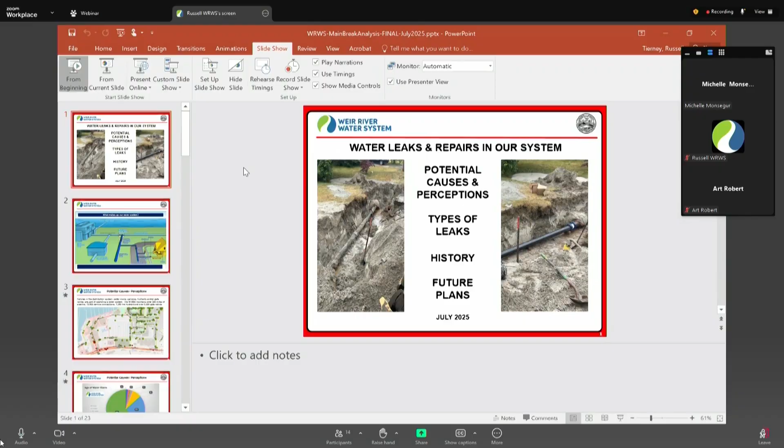So, Bill, we put together a small PowerPoint presentation, and I want to go through it as soon as it decides to come up. Can I get it closer? Sure. Never been accused of not being able to be heard.

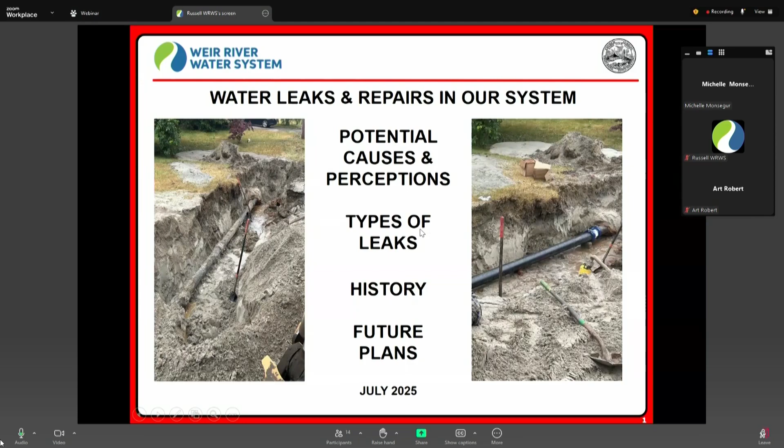So what we're going to look at today is potential causes and perceptions about the water mains and the causes for water main breaks, the types of leaks that can occur in the water system, the history of water main breaks throughout the past 10 years, maybe going back to 12, and then future plans to mitigate what is going on with the water mains and things like that.

What makes up our water system? This is basically just a sketch of a water system. Your basic water system is your water treatment plant coming from your sources. You have a reservoir that holds the water, which is our tanks. Then we have a complete distribution system throughout all three towns that we service. From there, the distribution system goes to service lines, which go to each house, or fire hydrants, which are for fire protection.

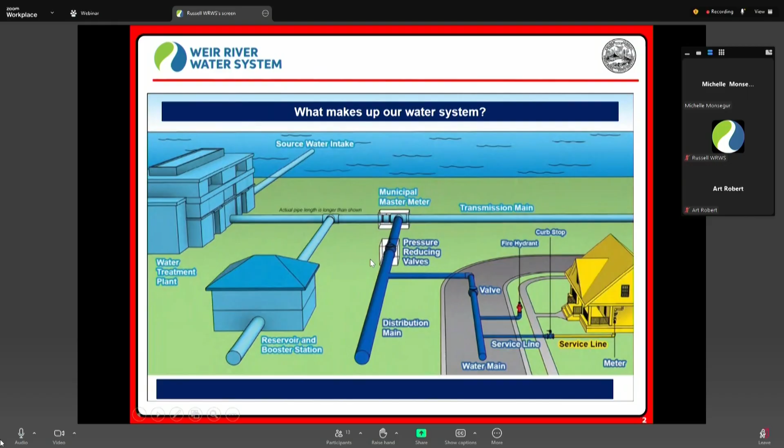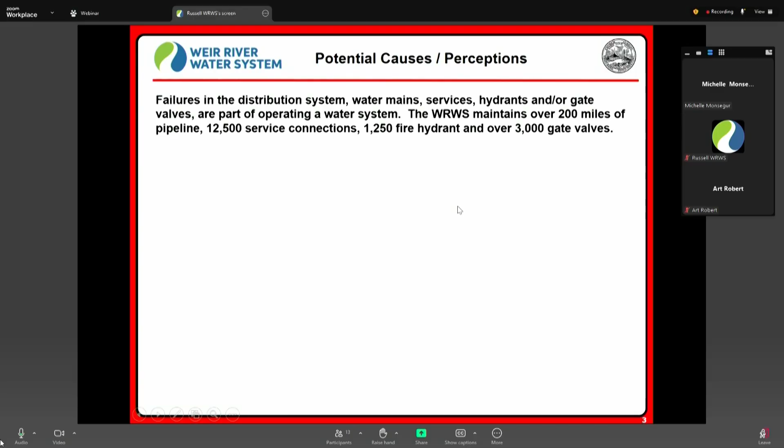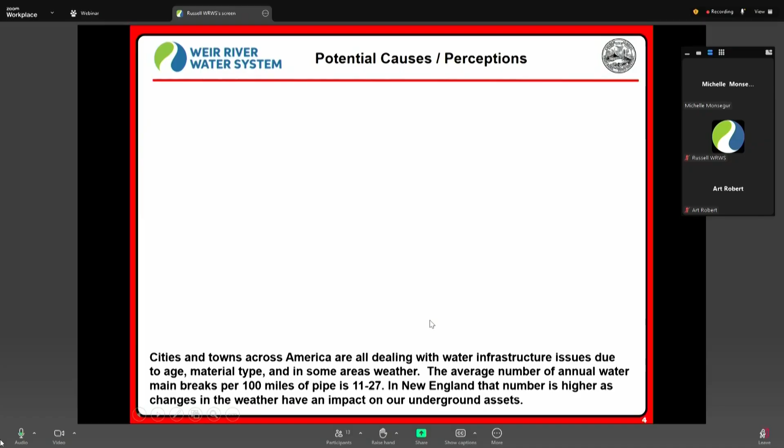Cities and towns across America are dealing with water infrastructure issues due to age, material type, and in some areas, weather. The average number of annual water main breaks per 100 miles of pipe is 11 to 27, based on a variety of resources that I found. The 11 is on the low side, in milder areas. The 27 is on the high side, in New England and colder weather areas. The average in New England is higher because of the weather changes and their impact on our underground assets.

This is the age of our infrastructure. The green shows that 64% of the mains in the Weir River water system are greater than 50 years old. When we did the master plan, we looked at every pipe over 50 years old, because by the time we replace stuff that's 75 years and older, it'll be time to replace stuff that's 50 years and older. So we decided as a group to go and look at everything greater than 50 years old.

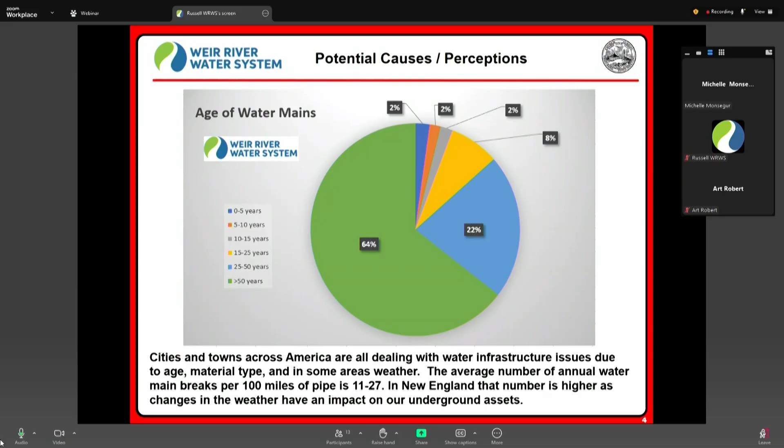Discolored water is often a result of water main breaks, service leaks, and on occasion planned system maintenance. Ongoing effective system maintenance is key in reducing the extent of discolored water during breaks and leaks.

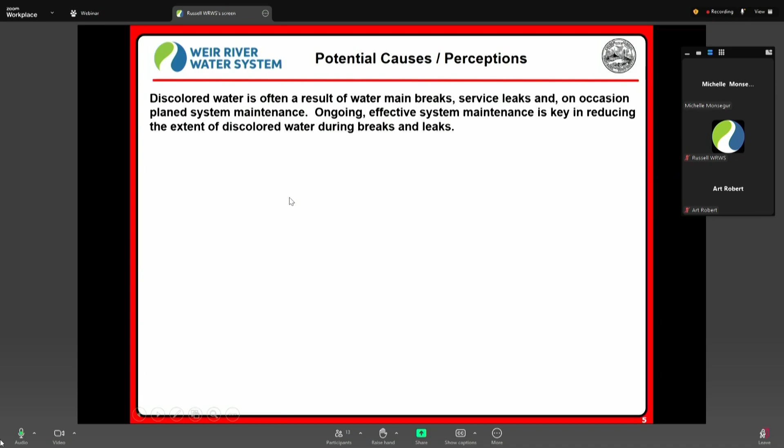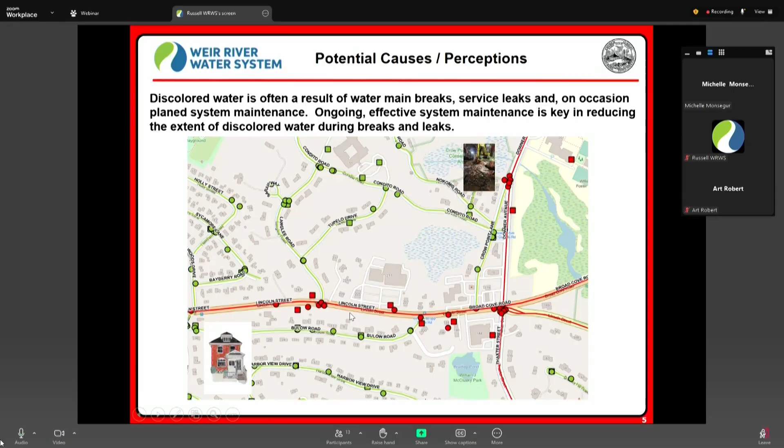Also, our improved communications protocol is contributing to the perception that the number of water main breaks has increased over time. Five years ago, we did not put out on Facebook that we had a water main break. We just had one, went and fixed it, and that was it. We would call the people immediately affected by it. They would know about it, but everyone around them would not. But we do think it is important to utilize these things.

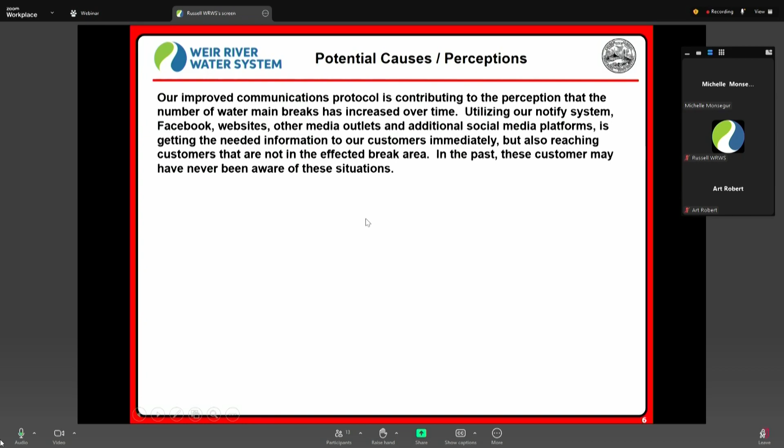So we utilize our notification system, Facebook, websites, other media outlets, and additional social media platforms in getting the needed information to our customers immediately. But it also reaches customers that are not in the affected break area, and in the past these customers may have never been aware of these situations. I am noticing in some cases there are people from out of town chiming in and saying things that I don't think they really know about. But again, we do feel that using Facebook and all these things are important to our customers, so we'll take that extra backlash if that's what happens.

What can cause water main breaks? Changes in temperature, thermal expansion, freezing and thawing. Over the wintertime, as the ground frost deepens, it can move pipes that are shallow, and then when it starts to thaw, these pipes will move and break. That has a lot to do with age and material.

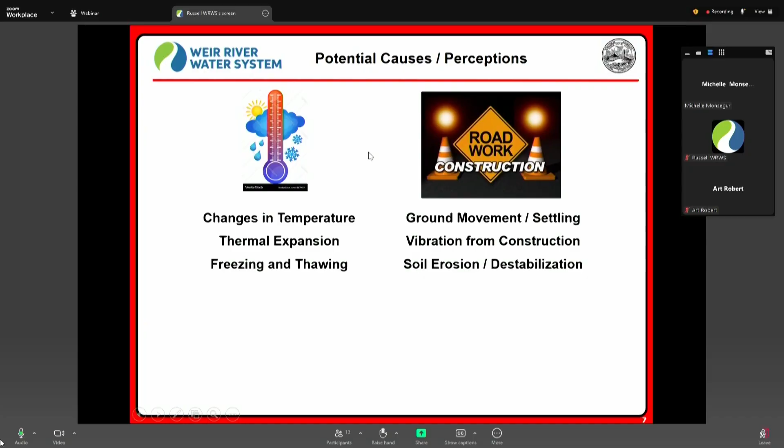Ground movement, settlement, vibration from construction, soil erosion, and destabilization. In some areas where we've done road construction, we're going to replace the water mains, because after you tear up the road and start compacting it again, the older mains are going to crack or something's going to happen to them. This is a really tough thing to do because sometimes we have to take the chance and not do that road, depending on where we are with our capital work and everything else.

Then age, pipe material, and corrosion. This is a couple of pictures of pipe that have been tuberculated. On the right-hand side is a pipe that's heavily tuberculated. That did come from our water system. The one on the left is more corrosion. Corrosion is not as common these days because we use chemicals to increase the pH in the water system, which mitigates the corrosion effects. But you also have to remember some of these pipes are 100 years old, so prior to using corrosion control, there was nothing being put in the water, so they already had that effect on them.

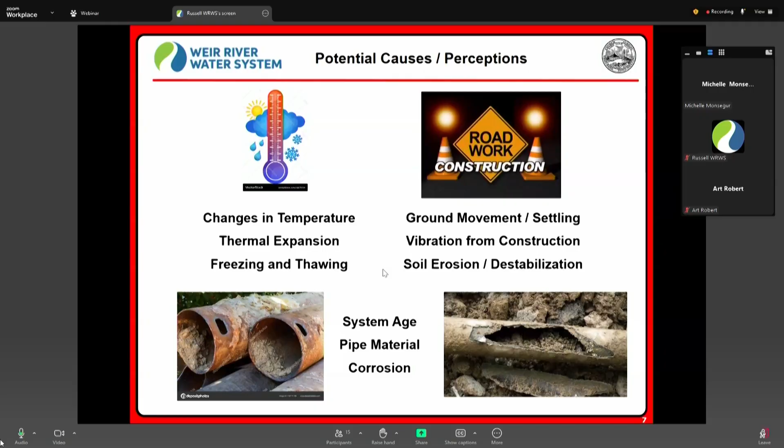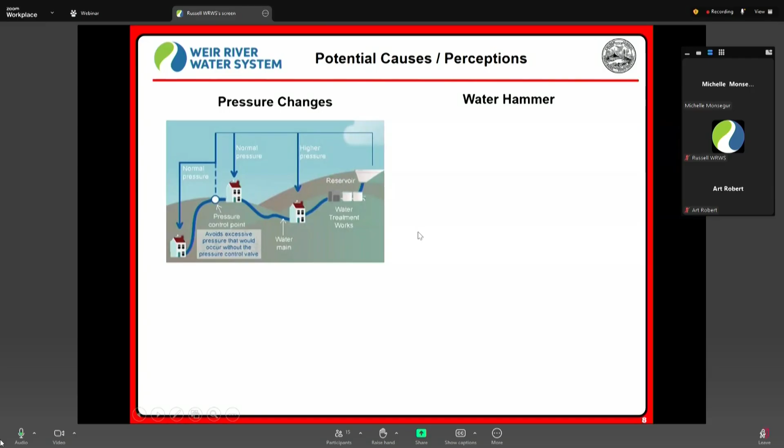Pressure changes: as the pressure changes within the system, it can cause water hammer, which is the next picture. What happens is the water hammer puts stress on the pipe. If the pipe is aged or in an area that can't absorb all that extra water hammer, the pipe will crack.

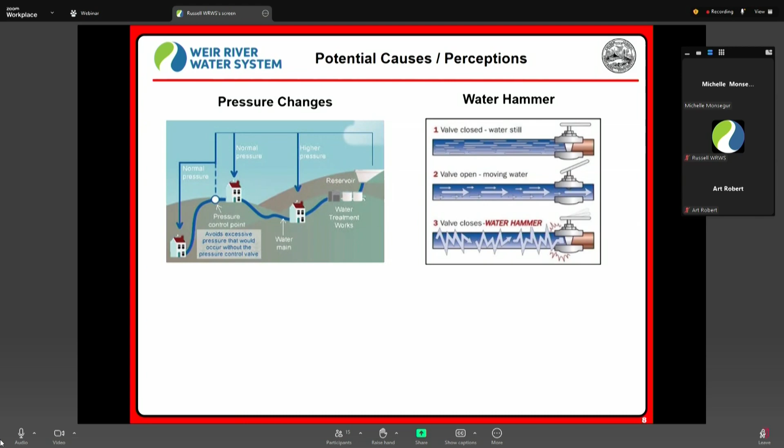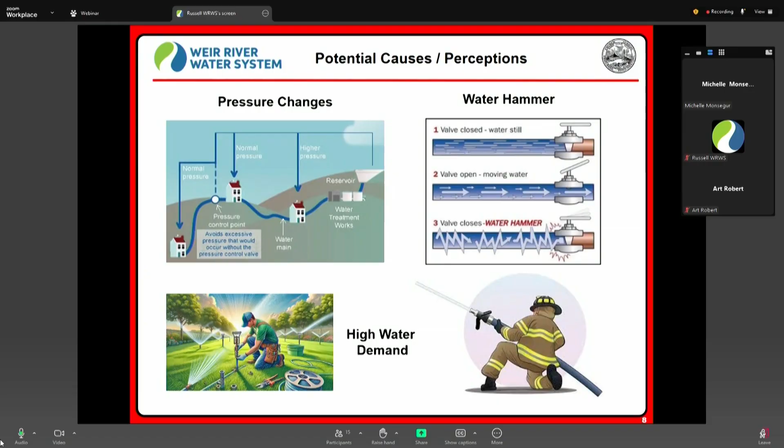And then most importantly is high water demand. So if we're fighting a fire and we have irrigation going on and we're trying to pump water out of the plant to keep up with the fire, it's going to cause water hammer. Water's going to want to go to that fire, but we're trying to push water to the other side of town. They're going to meet somewhere in the middle and cause a water hammer. Now again, as the system's designed and as things are put in place, water hammer can be absorbed by the system, but there are cases where the water hammer could reach a dead end or something like that and pop the pipe.

Types of leaks. We get leaks on water mains, which are our larger diameter pipes in the water system, typically greater than 2 inch or larger, and are used as a transmission line to distribute water throughout the system and provide fire protection. We get water service leaks. These are typically smaller pipes in our system, less than 2 inches, and provide water to individual residents and businesses. There are services that can be larger. It's in very rare cases for larger buildings, but again, most of our water services are less than 2 inch in diameter.

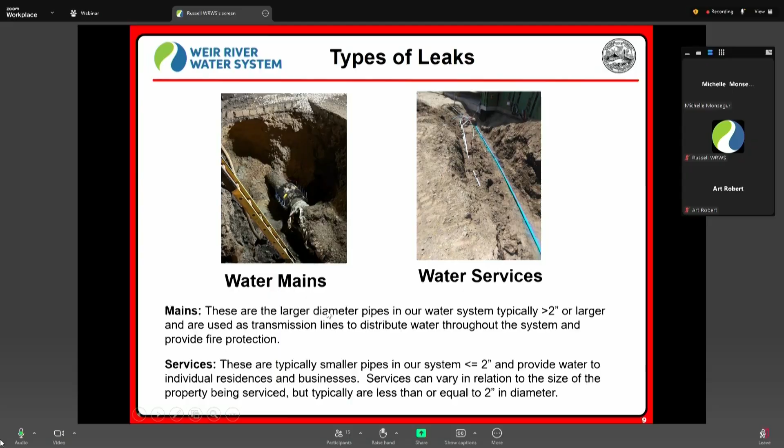We can have hydrants leak. Over time, the bottom of the shoe at the very bottom where they meet, sometimes the bolts can become corroded and they'll start to leak there. They can also leak at the valve that's connected to the water main over time. So these are things that when we inspect the hydrant, we can notice and then we can replace those fire hydrants.

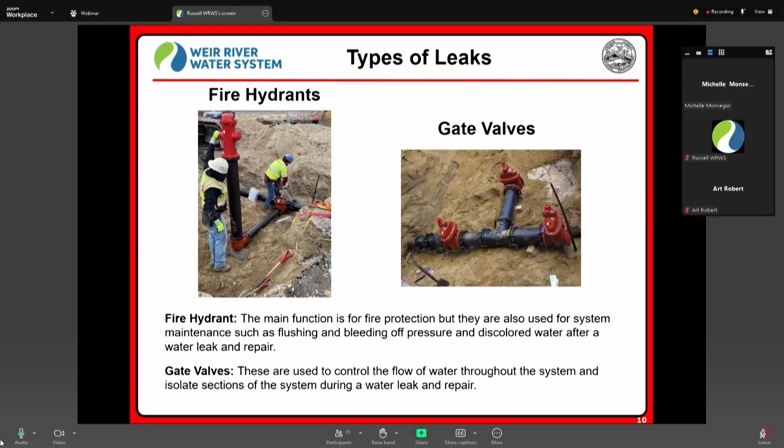And then valves. Older valves can leak, especially from the top. On the top of the valve is packing. As you work those valves, sometimes that packing will start leaking, and sometimes it just will not stop leaking. So that's why sometimes you'll see us work valves, and 3 days later, people will be calling up saying there's a leak in the street, but it's just a valve leaking. And sometimes they'll reset themselves. It'll start to reset itself, and then it'll stop leaking, but other times it will not. So those are the 4 major types of leaks we get.

So this is a graph on water main breaks, and I can't see my notes, why? That's okay, you can read it.

So prior to the town purchasing the water system, the average was 32.7 main breaks per year. I know this because I have all the information that was handed over to us by Aquarion. They kept detailed records of every main break that was done, and we continue to do that now. Currently, our annual average post-ownership is 21.3. So we are definitely decreasing the number of main breaks, but again, there are years that you have more. If you look at 2015, there was 41 water main breaks in the system. We are currently running at about 26 this year, so we got our fingers crossed we won't hit the 41, but again, it's been a bad year, and we realize that.

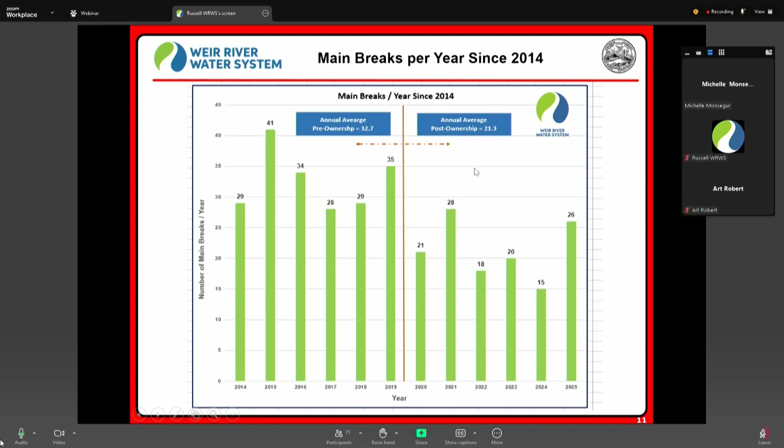So what are we going to do going forward? But first, I'm going to show you about the 100. So United States and AWWA and the American Society of Civil Engineers bases water main breaks per 100 miles of pipe. We have 200 miles of pipe in the system. Our average per year per 100 miles is 10.7 over the past 6 years post-ownership. Prior to that, it was 16.3, which again is not a big number. It's not close to the 19 annual average.

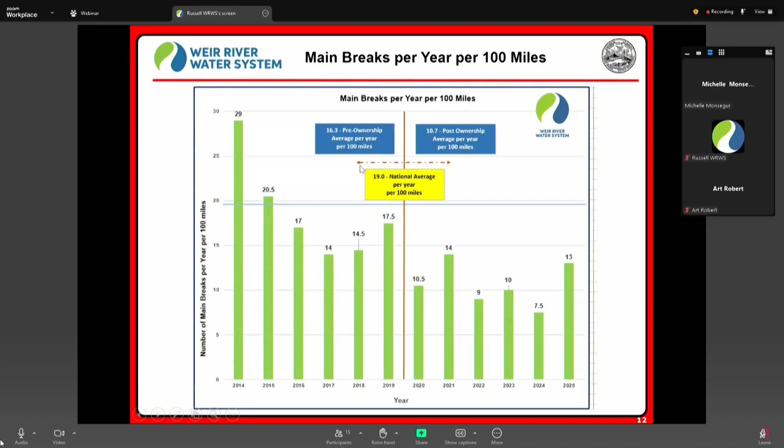Future plans. So during the past 4 years, and including this year, we have completed capital work that included replacing 23,500 linear feet of water main. 12,745 of that replacement line was recommendations directly from our master plan. We added 6,000 linear feet to create loops and additional service areas, and we've installed 84 additional fire hydrants and added 18 new gate valves.

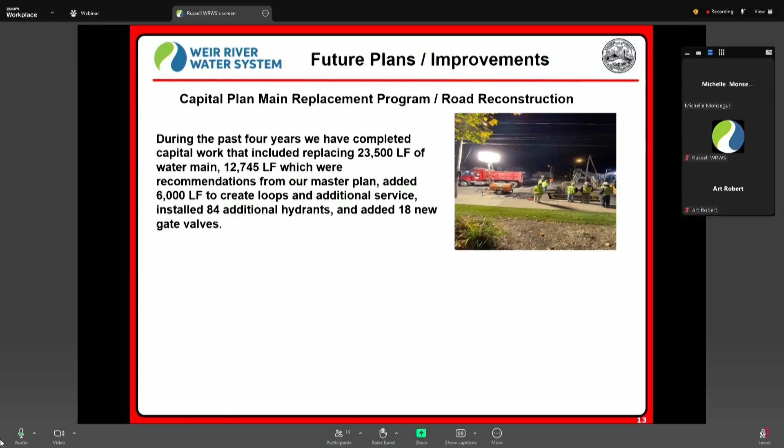We also have approved in the design phases and permitting currently the new Strawberry Hill tank. What that's going to do with the system, and we did do a presentation for both the water commissioners and the Hull Select Board, it's going to stabilize the pressure. Currently, we push water from 900 Main Street to the Turkey Hill tank, which then travels down to Hull. By eliminating the tank in Hull, it caused unstable pressure. You can go down to Hull and the pressure will go from 40 pounds to 60 pounds, back to 30, and then up to 70. And that's all from movement through the hydraulics of the system.

When we first started looking at the tank, our consultant said we don't want to design the tank, we want to do a hydraulic model and redo it to make sure it's right. We spent an entire year gathering information and running a new hydraulic model for the system, and realized that just throwing up a tank in Hull was not the answer. We had to create a whole separate pressure zone to stabilize the pressures in the system, so we'll have a third pressure zone when we do this tank. That's why we need a pump station at Kilby Street in Hingham.

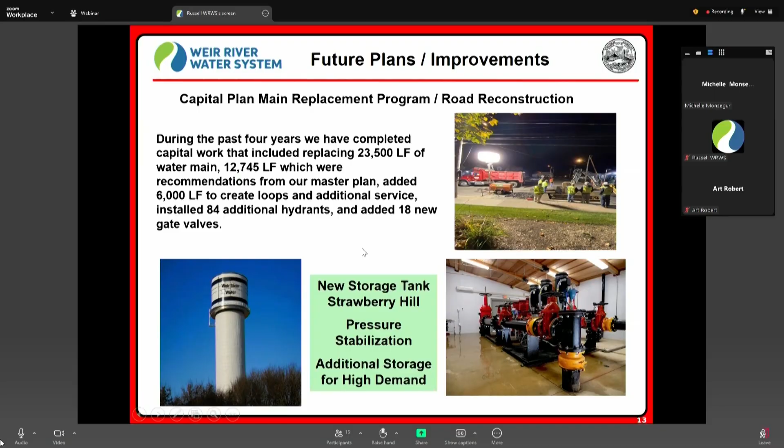Other future plan—I don't know what happened to the slide, I'm sorry. Hold on, I don't know what happened. It's me doing this, I'm going to go back to that slide. Okay, no, don't do it. I don't know what happened to the slide, but I apologize.

Main Street, this just came about in the past couple of weeks. I'm looking at replacing 6,000 linear feet of 12-inch ductile iron main. Looking at October of 2026 to start designing and permitting that. The project is in the beginning phases of discussion, and we may need to do it in 2 phases depending on other projects and funding.

I gotta go back more. Sorry.

Okay, got it. Next one, the Route 3A Rotary and Summer Street project. This started out as the state was going to redo the Rotary. They then expanded that to North Street, then to Rockland Street, and now they've expanded it all the way to Otis Street. So what we're looking at right now is designing and replacing 9,600 linear feet of 12-inch ductile iron water main. October of 2025, design and permitting. December of 2025, we bid and award it. January of 2026, pre-construction meetings. In February, March of 2026, we start construction.

After that, we're looking at Manomet and Samoset Ave. The town of Hull wants to repave both those roads, full depth reconstruction. They're both a mile long with a little more, so it's 11,200 linear feet of 8-inch ductile iron water main. We did look at upsizing that to 12, but because those two streets run parallel, the hydraulic model said we didn't have to go to 12 because the two streets will handle it, plus Nantasket Ave. Still not 100% certain we're not going to do 12, but that's where we're headed with the 8-inch for right now.

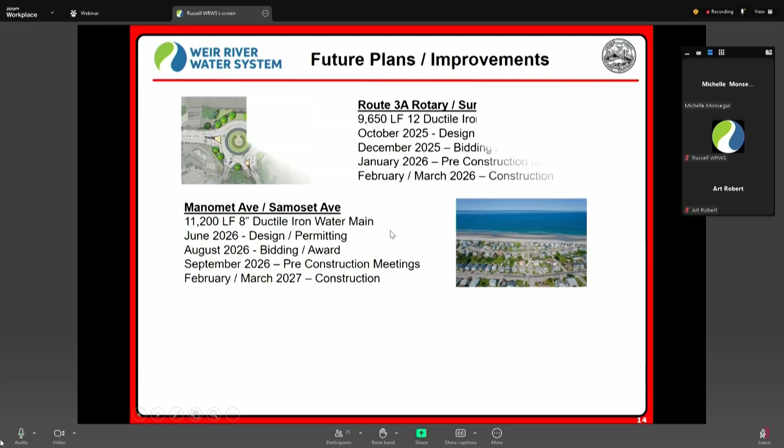June of 2026, design and permitting; August of '26, bid and award; September of '26, pre-construction; and then February, March of '27 for construction. Please be aware, some of these timelines might move up or down depending on what happens on these roads, or if we somehow have the funding to do them earlier, we will. The last one was Main Street, like I spoke about. If the Samoset and Manomet projects for full depth reconstruction get pushed off another year, I'll look back at Main Street and may do Main Street before we do that. But currently, it's going to go 3A, Samoset, Manomet, and then Main Street.

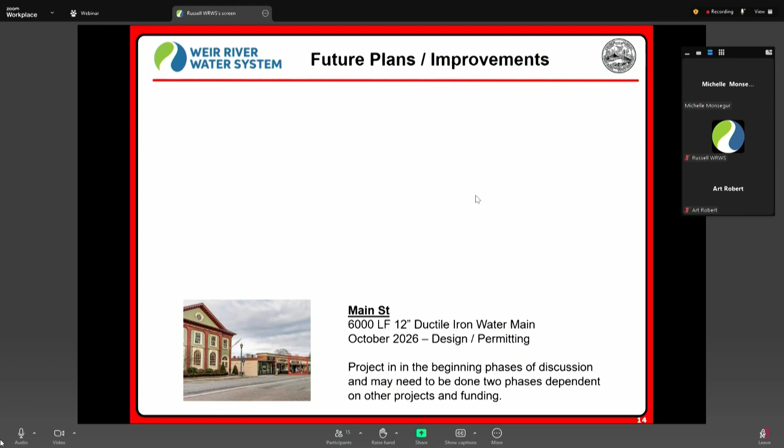I'm going to turn this over to Mike. Mike Lee, he works for Veolia, and Mike's going to discuss some of the flushing and other things we're going to start doing over the next 5 years that they're here. All right, thank you, Russell.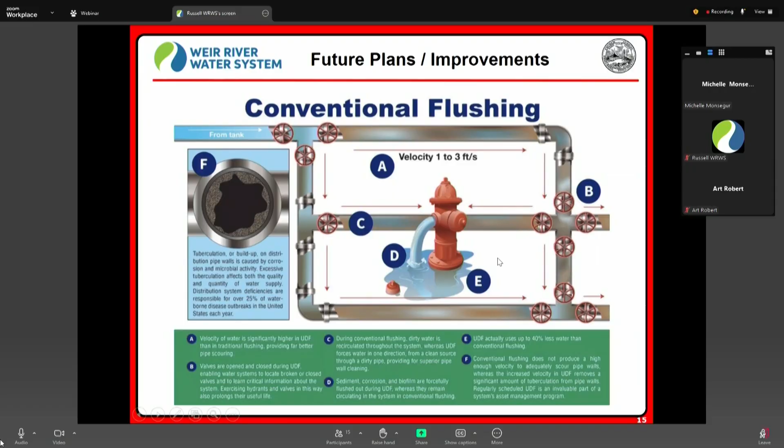All right, so UDF, unidirectional flushing—think of it as a one-way traffic lane in your water distribution system. We close predetermined valves in the system that redirect the water to increase velocity in the mains, and it performs a more comprehensive and efficient scouring of the main. But in order to perform UDF, we must inspect and ensure that all valves are working properly, because we're operating these valves, shutting them to get the water to go in one direction, which we need to increase the velocity.

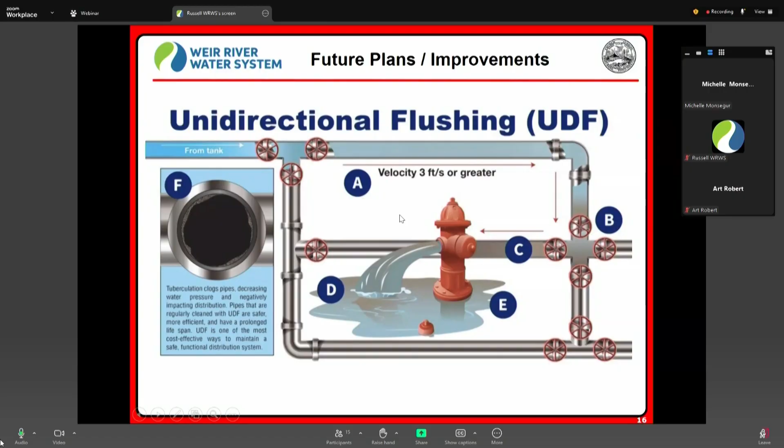Without all the valves working properly, it's just not going to work, it's not going to be effective. So we're working on this currently on one of the UDF areas in the system. We'll be ready in the fall. But the lack of system maintenance in the past is showing us that we have a lot of valves that need to be repaired or replaced before we start the program.

So, main break tracking and analysis. What we're going to do is use the GIS mapping that we have to monitor our main breaks. A Veolia GIS technician will plot all the main break locations on the map, which will allow us to easily take a look and pick out our problem areas. We'll see these clusters of breaks, and then we can work with our consultants to prioritize replacement.

We're also looking at, I've got a meeting later this week, where we're going to begin to utilize an asset management software called Voda AI. It's used in other Veolia systems and can assist in the planning of infrastructure, proactive maintenance, because as we all know, reactive maintenance is very costly. It uses AI to predict the likelihood of failure in areas by analyzing historical data, environmental factors, and pipe conditions.

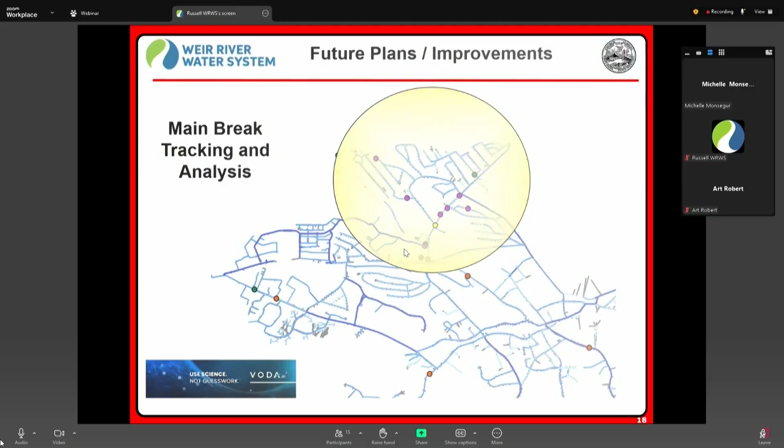So what we found out is there were pressure recording vaults in the system. At one point, somebody was recording the pressures throughout the system. We believe there are 10 to 12 vaults, 8 of them have already been identified, and we intend to put permanent data recorders in those vaults so we can monitor system pressure, see if there's any transient pressure spikes, 24/7, 365.

But in the interim, because that's going to take a while, right? We've identified these vaults, but we've got to research the equipment we're going to put in them, and it's going to be tied into SCADA. It's a little bit time consuming there. So in the interim, we're going to deploy hydrant-mounted pressure data loggers. You can see on the right, very simple units - we just mount them on the hydrant outlets.

What we'll do is we'll use that GIS mapping and target those areas where we're having the problems, right? The problem areas with a lot of breaks, and see if we have anything going on as far as transient pressures.

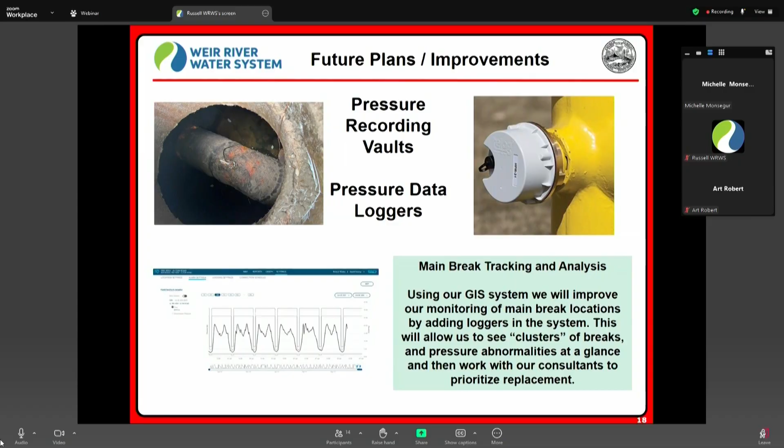We are developing an RFQ right now for the pressure sensors. We're going to put that out - I'm working with David, we're going to put that out on the street to get some response from companies that do these monitoring systems. So I'll have that done within the next 2 weeks with the procurement.

Our valve inspection and replacement program - distribution system gate valves are key to the system's hydraulics. As we all know, in the past the focus on these things was not a priority, and that's why we're having the issues we are. Closed valves can have a negative impact on the direction of flow, negative impact on overall water quality, to tell you the truth. It basically creates a dead end in the system that contributes to discolored water and water hammer, which again leads to more main breaks. Our goal is, aside from our in-house crews, to allocate additional resources to help with the inspection and identification of broken valves, as well as repairing and replacing them.

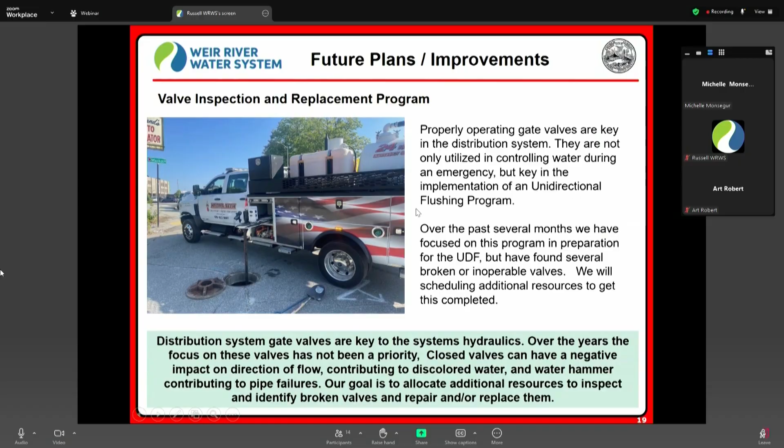That was my last slide, right? Yeah, I believe so. Good.

Now we want to talk about drought status and conservation measures. I know right now we're in a level 2 water ban. It was necessary due to the fact that our tanks were losing too much ground overnight, and we can only put so much water out of the treatment plant. One of the misconceptions right now is that we don't have enough water - we have plenty of water in our well fields, but we can't pull more than a certain amount of gallons out of those well fields at a time and get it to the plant. There's transmission lines from each well that come down Main Street or come up from Free Street that head to the plant.

We can only pull so much. There's still water there, but we can only pull so much to get to the plant. So we're looking at the raw water lines right now. Our water sources and capacity are in very good shape.

Several factors contribute to the decision when we determine what type of conservation measures we implement. One factor is storage capacity, not overall system capacity. If residents do not follow our recommended or mandatory water conservation measures, it can make it difficult for our plant to recover the tank elevations to ensure proper fire protection. In other words, we just can't keep up with it.

Water storage tanks are not for lawn watering, they're for fire protection. That's what they're built for. And they're also built for high demand times. But again, if everybody's watering every day, the usual high demand time goes through the roof.

Our current water conservation restrictions are being revised to match the state's drought status. Last year, the Mass DEP and the Drinking Water Program said that all registered water systems must start following the drought status. Currently there are 5 levels of drought status in the state, and I'm going to go over those real quick just so everybody knows what they are.

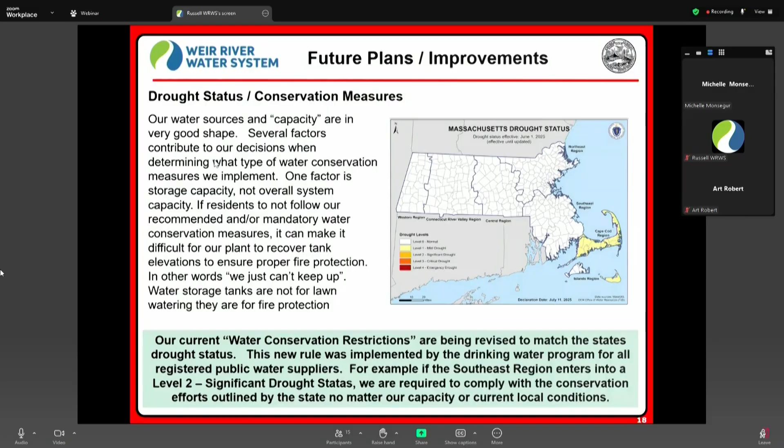If customers comply with our water conservation restriction plan in regards to annual restrictions from April through October, our system can maintain tank levels. Too many residents are watering every day.

So with the state, there are 5 levels. Level 0 is normal, no restrictions. Level 1 is mild drought. Now, if the southeast region goes into a level 1, even if we have plenty of water and we can keep pumping as much as we want, we have to follow the level 1 restrictions the state has. It doesn't matter if we say, oh no, we're all set, we have plenty of water. They are now requiring water systems with registrations to follow their drought status.

So even if the entire southeast region went into a critical drought, which means no outside watering, even if we have the capacity to let people water, we have to put it out that they can't, because the state is mandating it so that the rest of the region can try to recuperate from not having enough water. So basically, they're telling us when and what restrictions we have to put on watering.

I'm going to have this done before the end of this summer. It'll go in front of the board for approval on what the fines will be and all those things related to these, and we will start implementing them next year. We did all get a 1-year reprieve from the state so that we can put these all together.

The bottom line is, for a healthy lawn, you only need 1 to 1.5 inches of water per week, distributed over 2 to 3 days. So watering your lawn every single day is basically overwatering it. Watering deeply and less frequently encourages strong root growth and makes your lawn more resilient.

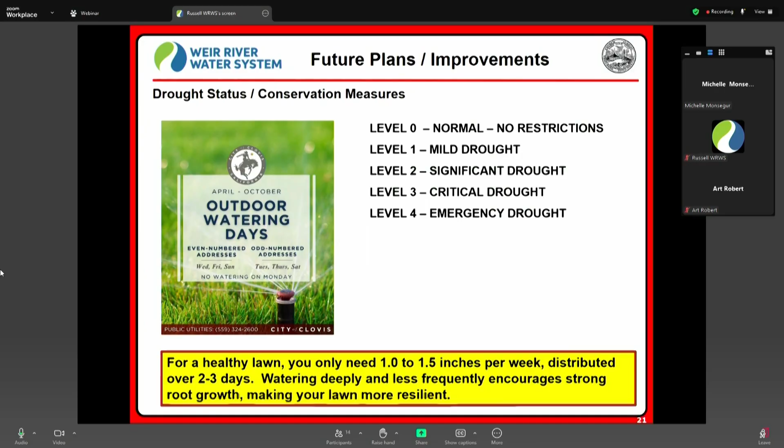Starting April of 2026, this will combine electric, water, and Hingham sewer into one monthly bill. After careful consideration and meetings with all stakeholders, it was decided to transition both customer service and billing at the same time, and we all decided it was in the best interest of the water system to postpone it 1 year. So effectively, on July 1st of 2026, the town of Hingham will take over billing and customer service from Veolia, and then start to do that from HMLP.

So we're really asking customers to please stop calling HMLP, because they are not involved in our day-to-day operations, and we're kind of cluttering up their phones when we have a main break. But we are looking at better ways to quickly get information out to everybody so you don't have to call customer service.

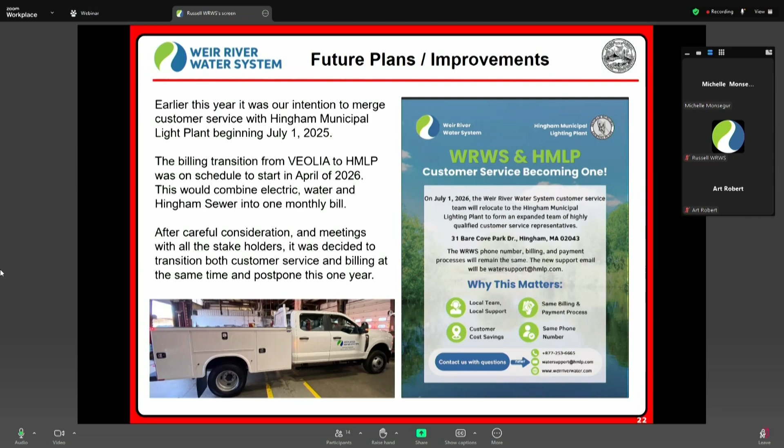I'm going to start off with a couple questions. So, Russ, can you tell us again what water hammer is and how that causes disruption? So basically water hammer is when the water's traveling through the system.

The force will then put more stress on the main, and the main will break. So if we have a few closed valves in the system that we have not found yet, or the 3,000 that we have, this can be a factor in these situations where mains are breaking. So if we start clustering the water main breaks, we can go through that area quickly checking all the valves.

We will start with a methodical valve program where we'll start in areas and just do them. But again, like we saw a few main breaks in the past 6 months, so we're going to kind of focus on those areas.

Focus on those areas over the next couple of months to get those checked to make sure all the valves are open. The pump station on Kilby Street, I know we've done our necessary approvals. What's the status of that? The status is both Concom and zoning have approved it.

We do have our regular Concom conditions, which is fine. We're working on doing some drilling next month on both the Strawberry Hill site and Kilby Street to make sure the soils are good. Then we'll continue with the final design, and final building permits should be going in September, I think.